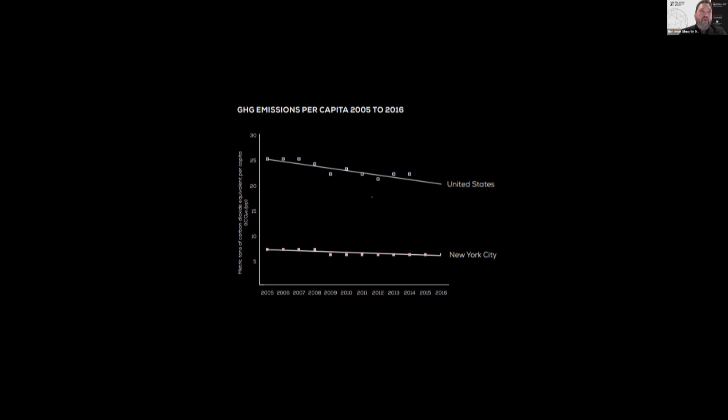In relation to climate change and the environment, cities are absolutely the greatest producers of CO2 emissions and greenhouse gases. But on a per capita basis, we're actually much better than ex-urban areas, so there's an opportunity there. If we can get people living sustainably and well in cities, and we can improve our cities, that holds some of the ingredients in addressing the climate crisis.

In terms of health and longevity, the article asks, is city life killing you? But it says you're more likely to get in a traffic accident, die of a gunshot wound, or suffer from high blood pressure, obesity, or diabetes if you live in a rural area. Longevity and health outcomes are better in cities, and there's an opportunity to improve and respond to major crises in our urban centers effectively.

And so there is a role for our public and cultural spaces within cities, simply to create places where people want to be in cities, to draw people to cities, to create environments that attract people there and make them want to stay and live in cities—contributing to the opportunity to create a more sustainable, more carbon-efficient global environment, and also to cooperate and live in a collaborative way.

Addressing problems together. When we got hit with COVID in 2020, obviously New York City was one of the places that got hit earliest and hardest. Our streets and public spaces shut down, and there was a terrible shock to the entire urban environment here—the way that we lived, the way that we worked together, the way that we shared our life in public, entertained ourselves, and in every other conceivable way.

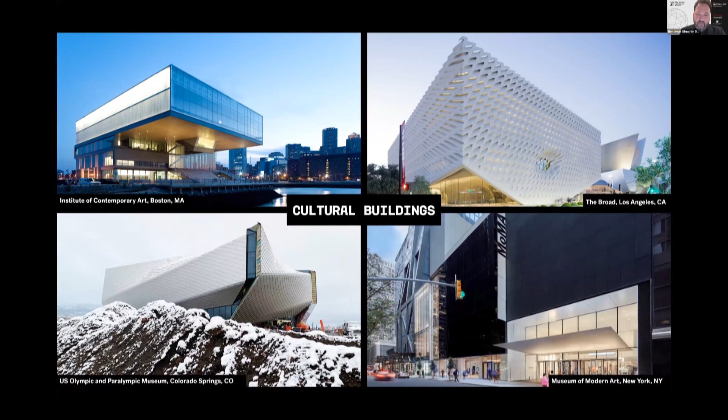So at DSR, we're 4 partners who collaborate on design and everything together with 120 staff in New York City. We're known for doing cultural buildings, museums, performing arts, and education spaces, as well as public spaces, a lot of outdoor public spaces and spaces of culture that engage and activate public space.

So I'll look at 3 projects fundamentally. I'll revisit Lincoln Center as a public space and look at what drove that project, as well as how it's transitioned through the last 2 years and what that has to say about lessons we've learned about public space and its ability to help in addressing the unforeseen in cities.

And then I'll look at Highline and the Shed, which are also in New York City and are cultural and public space projects. The Shed, in fact, opened right before COVID and has persisted through.

And then finally, as Natalia mentioned, I'll transition geographically to looking at the U.S. Olympic and Paralympic Museum, which opened during COVID in 2020 in Colorado Springs and is a sort of urban catalyst project, which has survived and is thriving now in that area.

So a quick tour of Lincoln Center: our design there was originally an acropolis of the arts in New York City, raised on a podium, a kind of megastructure complex for the arts, and over time came to be perceived, as the city grew up around it, as disconnected from the fabric and vibrancy of the city in which it was situated. Our work there stretched across 12 acres, had quite a bit of public space.

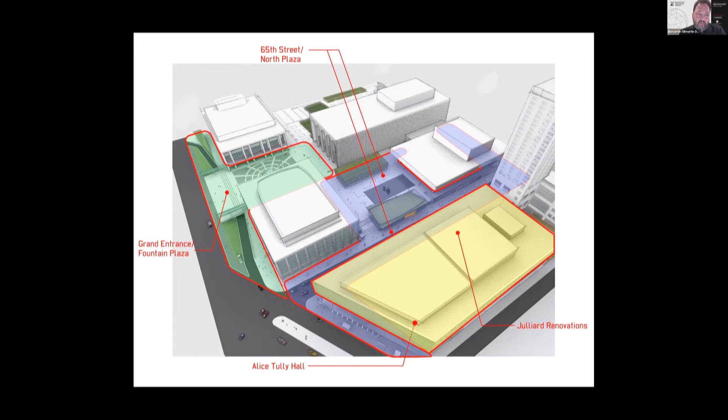We did expansions to the Juilliard School, the North Plaza, and a rethinking of the Columbus Avenue Grand Entrance and the Fountain Plaza there.

Lincoln Center was always a relatively majestic and fairly spectacular public space, with incredible energy and public life that we were inspired by and wanted to build upon. But it was also a project that conscientiously turned its back on the city around it.

Arriving at its front door, you would cross 11 lanes of traffic on foot, arrive at a rather meager set of monumental steps, and then have to cross 2 more lanes to arrive at Philip Johnson's plaza, Josie Robertson Plaza.

So our primary gesture was to suppress the vehicular traffic, reconnect the pedestrian plaza to the city street at Columbus Avenue with gentle terracing steps, to introduce gentle sloped or ramping ways up into the porticos to provide universal access to the plaza for everybody, to bridge over and provide a kind of inviting arrival below for cars.

But separate from the public access to the street, and to produce a new kind of digital marquee embedded into the grand stair steps that spoke of everything going on in the campus programmatically, inviting you to be there and to join in the public life of the campus.

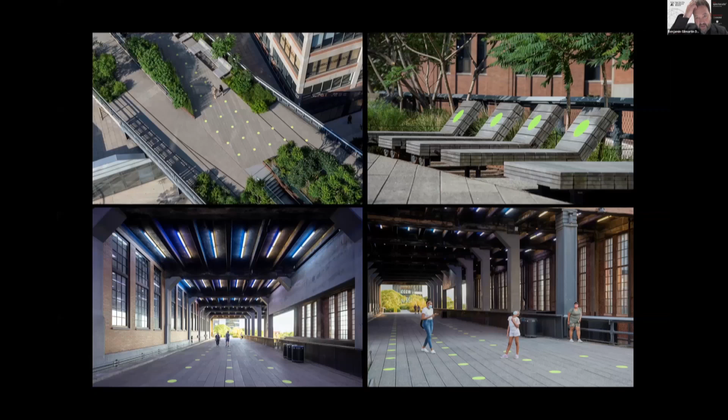When COVID happened, obviously it closed as well, but it was one of the spaces of the city that was able to reopen more quickly than most uses, offices, and other things. And again, it became a place to go in the city at a much lower density than it had been before.

But it produced a kind of experience of being out in public with others, an ability to regroup, to enjoy being in the city again, and to rekindle social life and opportunities for the exchange of ideas.

So in that sense, I would argue that the High Line was a space of social resiliency during COVID.

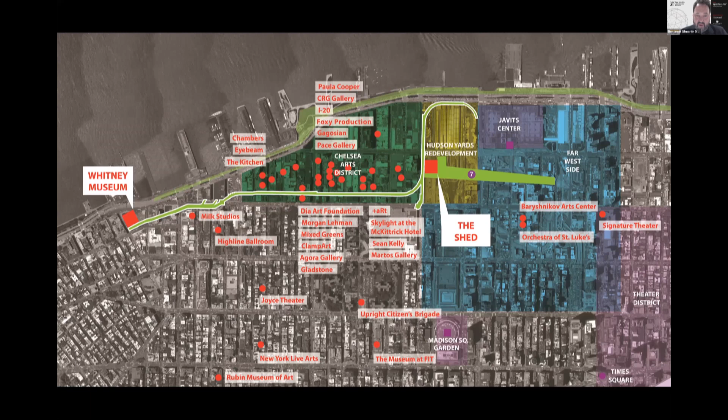The High Line connects to the Shed, which is another one of our projects. The two together form a kind of ensemble at Hudson Yards. The Shed is a 150,000 square foot infrastructural space for the arts, performance, and creative practice.

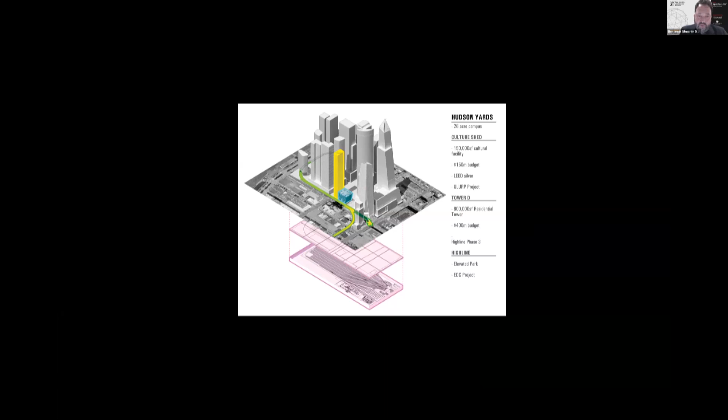It's located within the heart of Hudson Yards, nestled amongst all of the density of the new towers built there, and conjoined with the infrastructure of the development as a whole. It shares resources with the 15 Hudson Yards Tower, which we also designed, a residential building.

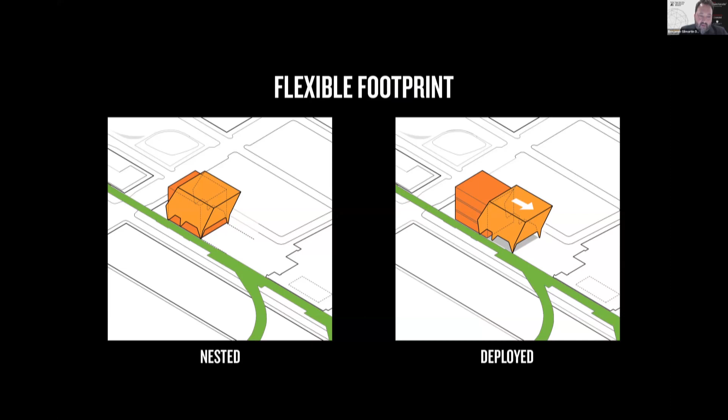Its primary attribute is that it's a massive structure that can deploy and capture the public space of the plaza to the east of it, and use that as sheltered, conditioned, programmed space for arts, performance, and culture. When not needed, it can retract and nest over its fixed building with the galleries and performance spaces inside, ceding the public space to outdoor use once again.

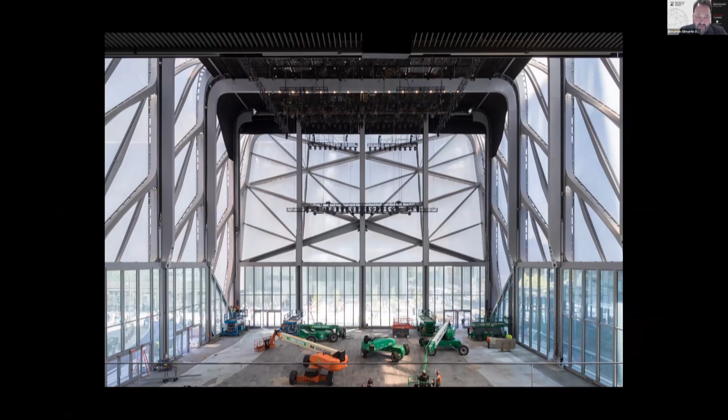It uses reinvented industrial crane technology, and there it is on the southern 30th Street corridor, deployed, and from the north you see it deployed—the massive interior volume it offers with its theatrical rigging and its ability to open or close to the outdoors.

When it opened, it had enormous events like the Soundtrack of America inside the McCourt Hall. These were vibrant performances filled with people—concerts by Bjork, multiple theatrical events, street dance by Flexen, and a lot of arts and music presentation within. This is Reich, Richter, and Part.

It also was a place that would simply open up at times to the public, providing sheltered space for food and public space to hang out.

And when COVID happened, there was an opportunity because of the nature and flexibility of the Shed—the way that it could shelter public space and produce an almost outdoor condition inside with social distancing, but with the infrastructure to support performance and cultural activities—that it proved to be a successful venue that could continue programming during COVID.

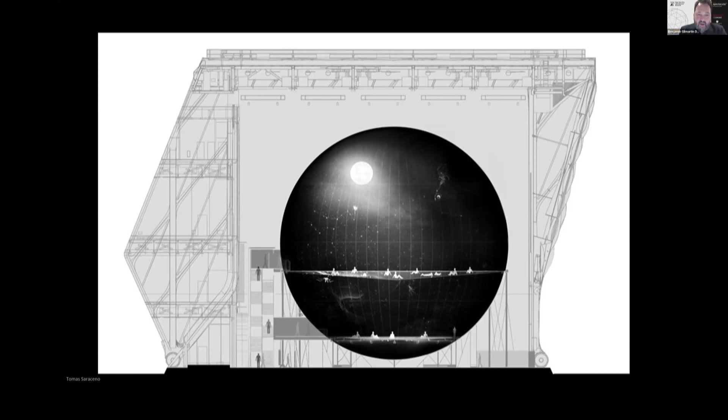That was early on, the Philharmonic doing a performance. Later on, Tomas Saraceno, earlier this year, did the installation Particular Matters—the large sphere with a spider web inside, where people at low density could go in and be suspended within the sphere on the web, experiencing the interaction with each other produced through vibration across the web.

Drift was again a low density installation within the volume of the Shed, and later Fashion Week. Again, the volume of the space produced a sense of comfort, almost as though it were an outdoor public space, but sheltered from the elements—along with experimental performances like Kinetic Light from artists within New York City.

So that's the Shed deployed on the High Line. Together, I would say the High Line and the Shed produce two different conditions of resiliency within COVID: programmed space in the Shed that's curated and highly controlled but engaging a broad public through culture, and the High Line, which is very open-ended, flexible, and generous in the way it produces outdoor spaces that fostered and nurtured the regeneration of public and social life during COVID.

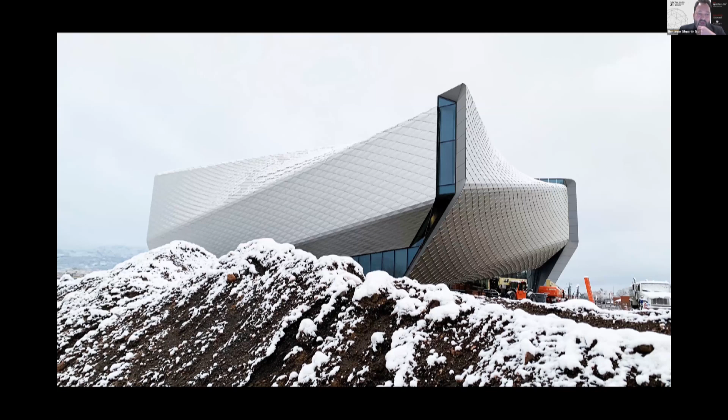The last project I'll speak about is the U.S. Olympic and Paralympic Museum in Colorado Springs. This was a project started about 5 years before COVID happened, dedicated in what's called Olympic City USA, to telling the stories of Olympic and Paralympic athletes in a museum—talking about their struggles as well as their triumphs and a lot of the history around the Olympics.

This is the site in Colorado Springs on the northwestern edge of the city. You see its backdrop is the spectacular Rocky Mountains and Pikes Peak.

It was actually intended also as a catalyst or revitalization project, meant to produce in a defunct industrial edge of the downtown a new sustainable high density growth for living and working. Quite a lot of development was meant to happen around it, but it was to become the anchor project for that development.

In approaching the project, we imagined a two-part museum building that, instead of culminating at the end of the axis, framed Pikes Peak beyond it and formed a plaza below that was a generous and welcoming space to visitors and locals alike. This is the Olympic Plaza and the museum building. Opposing it is the smaller cafe and education building, which is a landform coming out of the site.

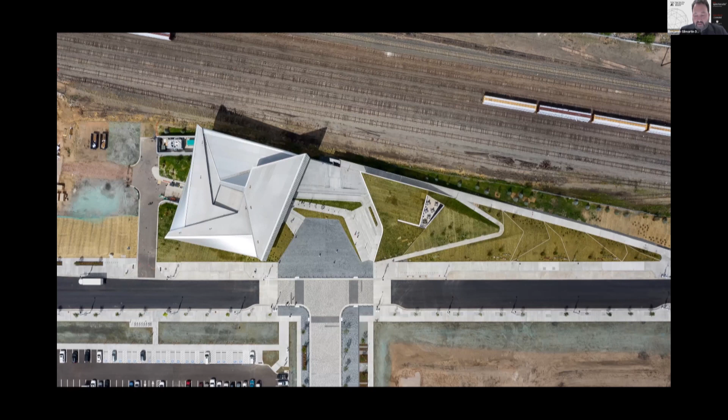And there you see the way in which the circuitry of ramps and walkways across the site provide accessibility to all areas of the site through multiple very gradual paths that ascend and descend the landscape and pull the public directly from the plaza into the museum.

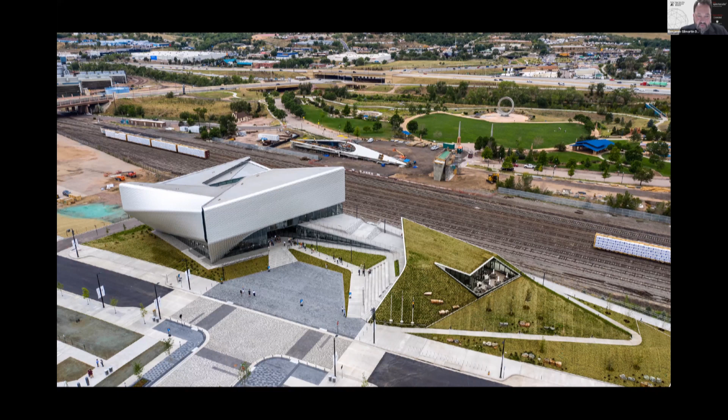So just again, the press of opening was actually 2020, and then a reopening in 2021. The careful attention with the interactives within the museum around creating no-touch interactivities, using RFID devices and whatnot, so that experience was natural and did not require contact. And so the story of an anti-COVID tech when it opened.

The design of the museum is such that the public spaces sweep directly from the outdoor plaza into the lobby and connect from the bottom to the top. Typically, you would ascend a room-sized elevator from the central hall to the top of the first gallery, and then there's a continuous sloped and ramped path from the galleries in two cycles from the top to the bottom. So a universal path shared by everybody, people of all ages and abilities and backgrounds. Everybody takes the same route.

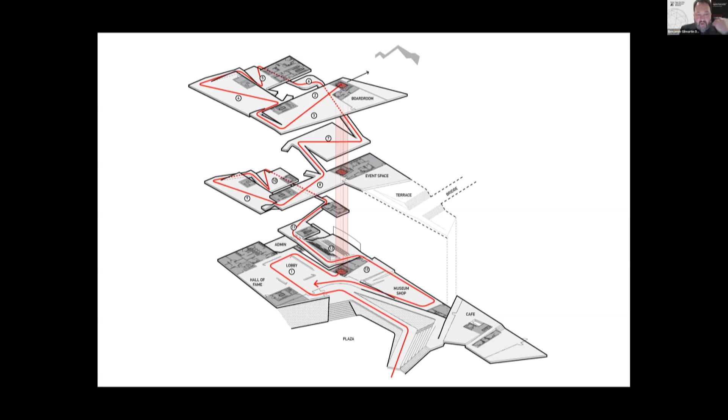And so in that way, it's intended to be completely a universally accessible building, and one that's very in keeping with the stories of the athletes, particularly the Olympic or the Paralympic athletes, that there's a kind of a universality to the way that architecture works.

The building's organized around a central hall space where you arrive, which has daylight streaming in down the walls from the top to draw your eyes up, create a sense of aspiration.

As you arrive at the top, the movement through the galleries is effectively a kind of a pinwheel from the center to the perimeter and then back, traversing down a level on ramps, and then again, and then again. And overhead, a clerestory light produces a kind of natural or intuitive wayfinding vector. So as you follow the daylight seams of the building, they tell you where to go from one level to another through the gallery sequence.

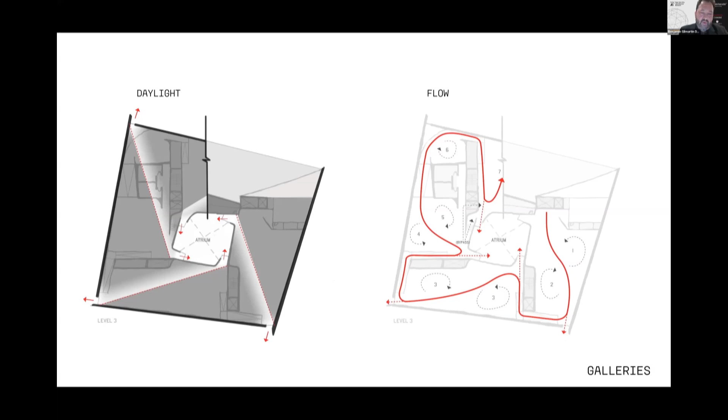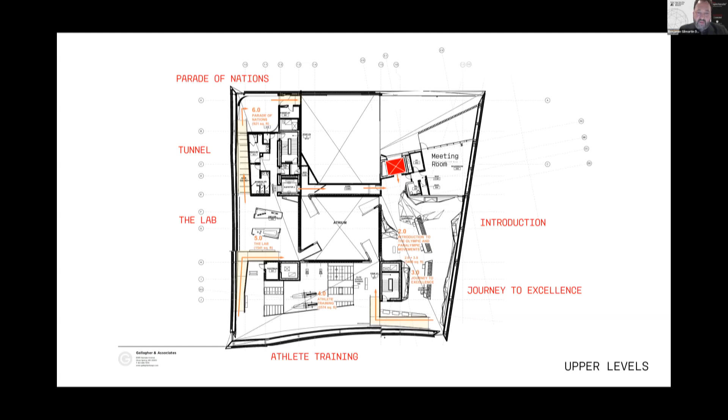And this is just a typical plan at the top showing the storytelling approach. We didn't design the exhibitions within, but collaborated on their relation to the building. The journey to excellence, athlete training, the lab, the Parade of Nations experience, which is the beginning of the Olympics at the opening ceremonies, and on and on.

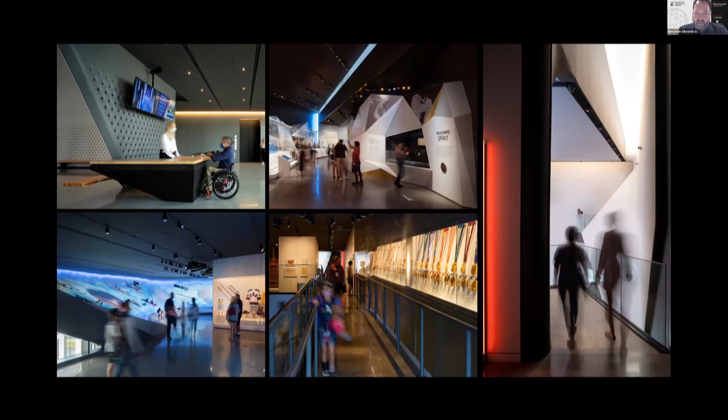And the spaces are black box spaces that are rich with content, objects, and interactive experiences to tell the stories of Olympic and Paralympic athletes.

And in between, you can effectively peel behind the fabric of the atrium walls out on these small perches, take a pause from the experience of museum storytelling and overlook the space of the central hall. Again, reconnect with people who are arriving and sort of clear your head or take a momentary break and then return to the cycle of galleries.

The architecture works sort of like an origami with the shell of the outside folding over and under itself to produce seams of light, as I mentioned.

And the skin is a tessellated fabric of scales that resemble, in a sense, like a garment, like the shark skin swimsuit of Olympic athletes. It feels like a skin that's stretched over the bones or the structure of the building as it's twisting and turning to make these pinwheel movements as people move through the galleries within.

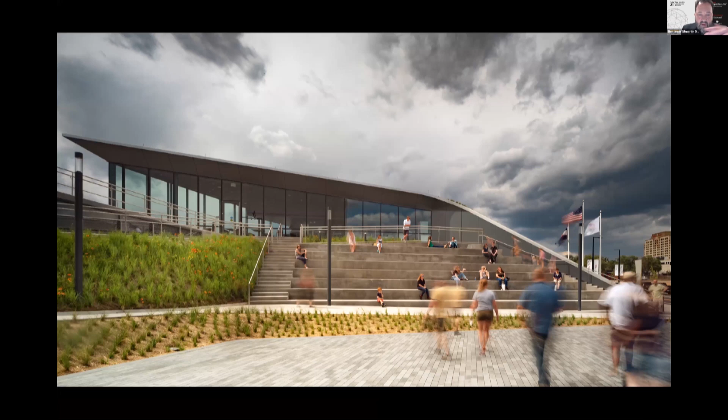The cafe and restaurant have gentle seating risers that invite you to hang out and people watch in the plaza or simply have lunch. It's intended to be a very welcoming, friendly, and engaging space, again, for locals as well as for visitors. And you see the way that the forms of the building within the public space are twisting and turning, and they produce gradients of light and shadow as the very dramatic skies of Colorado Springs are constantly changing.

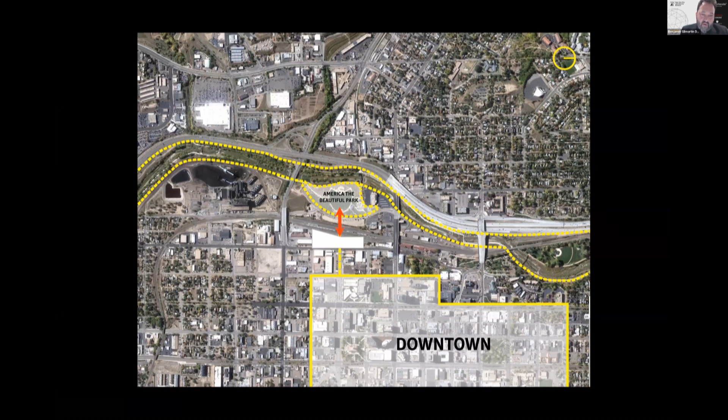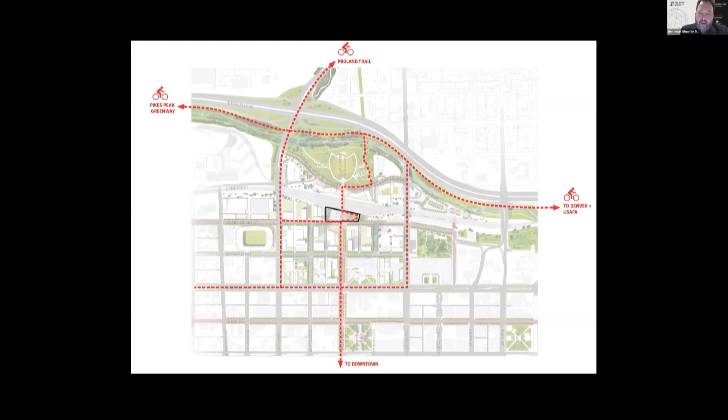A second component of this project, and a very crucial one, was the addition of the Park Union Bridge, which connects the museum across those 12 active rail lines to a park across the way called the America the Beautiful Park. And this reinforces a larger network of cycle and pedestrian trails that connect to the mountains and through the city of Colorado Springs and ultimately along a greenway going to Denver.

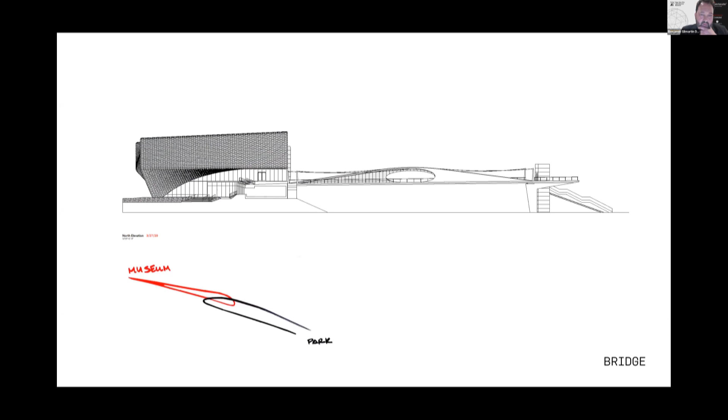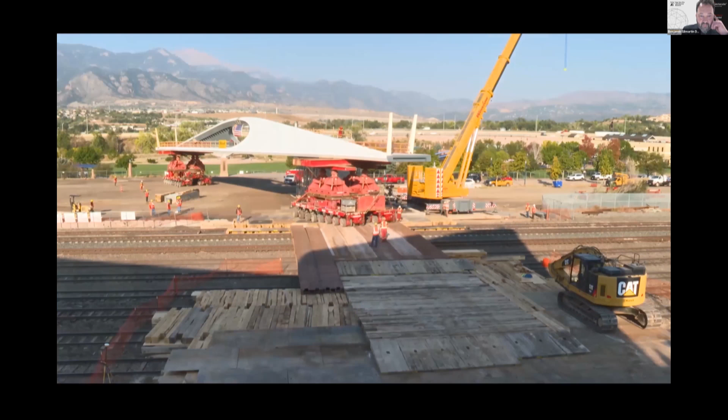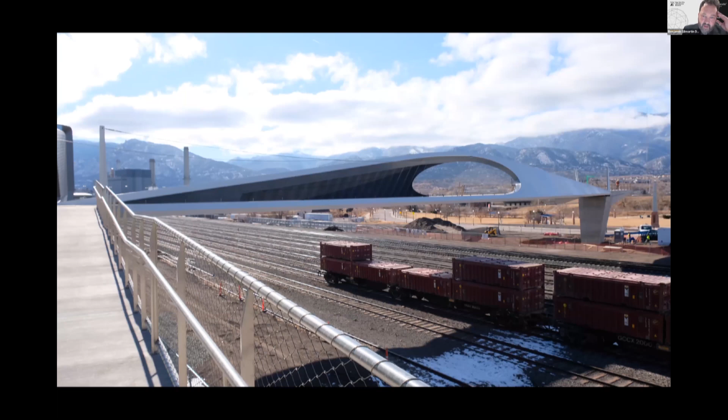I'll skip that in the interest of time, but the bridge was fabricated and assembled on site from prefabricated components, then conveyed across in a single day over the rail yards and dropped in place so that it had minimum interference with the active rail lines.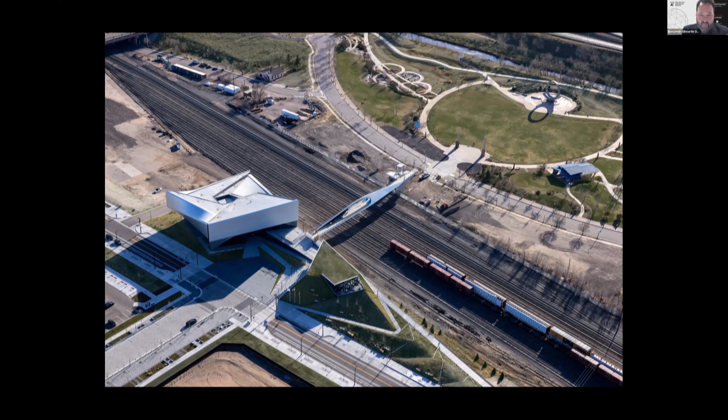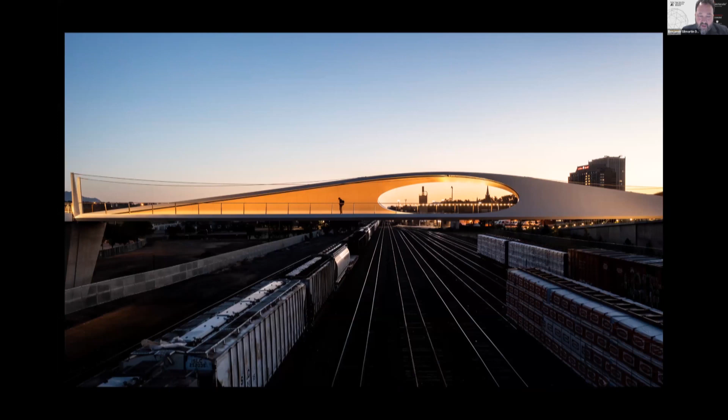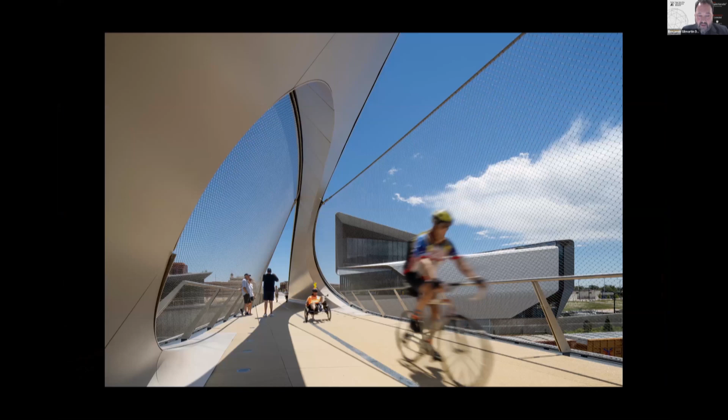There it is, illuminated at night. In a way, the bridge itself is a kind of public space. It's a place to transition from one side to the other, but it's also a place to stop and overlook the city or the rail lines. And it's an active place that supports the active life in the city of walking, cycling, and all forms of mobility.

So this project is still going strong since it opened, and the urban catalyst or change it was intended to bring about is beginning to happen: the planning of the new light rail connection to Denver, stopping here, and the planning for high density residential and even some office and retail areas all around it. So it is intended to produce a kind of sustainable fabric within Colorado Springs that fights the general sprawl moving out into the countryside, by concentrating people in the city core.

As a project, we believe it's fairly successful through COVID in hosting outdoor events and functions in a way that promotes social life and a kind of spirit of striving for excellence in whatever you do. So, that's what I have to talk about today.

I think that, again, I would call it a very personal attempt to speak about how the work of designing public and cultural spaces in cities, we believe, is a crucial role for designers and architects. It's not the end all, but it's certainly an important ingredient in making sustainable and healthy cities. And I do believe public spaces produce a kind of resilient condition within cities that helps address the unforeseen when it comes our way. So with that, I'll turn it over to Natalia.